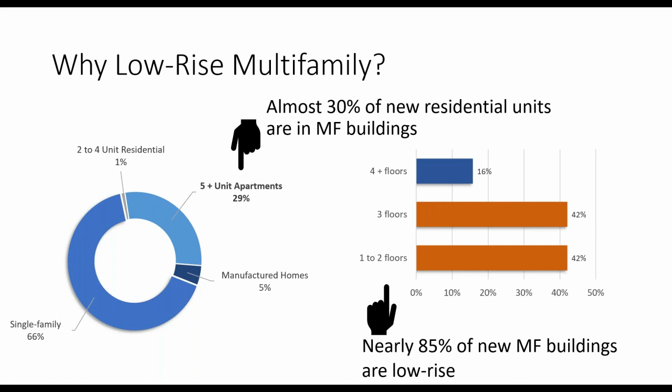For this study, new meant 3 years or newer. The sample frame, given how long these things take to get going, went back a few years, and we'll look at the codes involved in these construction projects. New means not like in the last 2 years relative to 2018, but more in the 2013 to 2016 range, roughly. And again, up to 3 stories above grade, with 5 or more units.

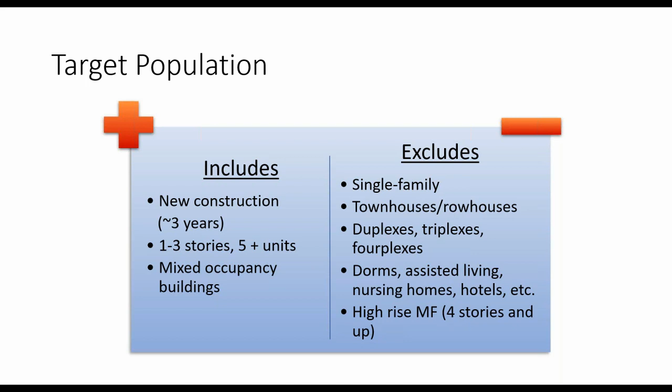Mixed occupancy means that in some cases there may have been commercial space on the ground floor, depending on the site. The study did not look at any single-family homes, duplexes, townhomes, or anything 4 stories or more, mid-rise or high-rise. So just to make clear what we looked at.

One more thing to note here, which has implications both for basic energy characteristics and predicted energy use, but also especially for air tightness testing: there are 2 main construction styles in the sector. One we call garden style - and I don't even know where that term came from - but it means we have exterior entry to each living unit, and the corridors, such as they are, essentially open to the outside.

That facilitates a different type of air leakage test. You can use the common space as a communication point, which is helpful in terms of the speed of doing tests in that type of construction versus garden style. This is important to keep in mind because a lot of the data summaries are broken out by these construction types.

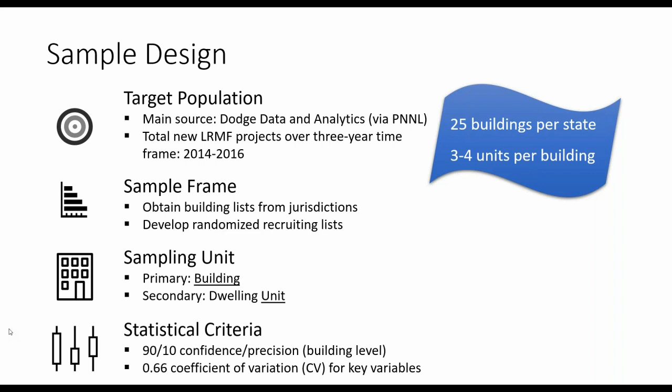We did the work in Illinois, Minnesota, Oregon, and Washington. Because of where people live and where these buildings are being constructed, most of the work was concentrated around larger cities and some smaller cities. In some cases we ended up surveying a near census of all eligible buildings in certain parts of the state, just how it worked out.

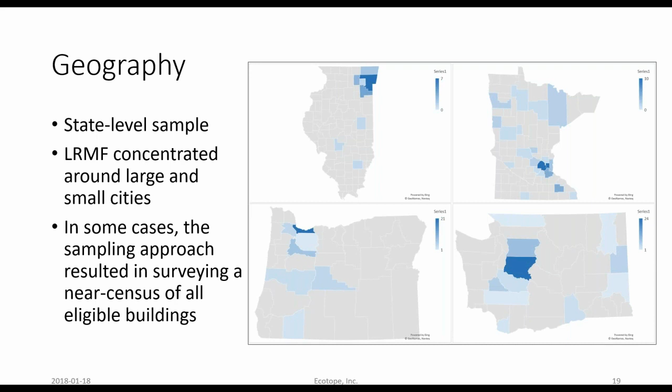Illinois, in the upper left, had a lot of work concentrated around the Chicago area, with some downstate. Minnesota was also concentrated around the major Minneapolis area, with some other representation around the state. Oregon covered Portland and the Willamette Valley. Washington covered Seattle and King County, with some on the east side around Spokane and a few other sites around the state.

As mentioned, this was a two-stage sample design. We start at the building level, meaning the overall complex, where the address is. This includes both common areas and living units in some cases, depending on the building type. The secondary sampling unit was the living units themselves, and generally we selected 3 to 4 units per site.

This was somewhat up to the field surveyor, but the idea was to make it as random as possible to improve the representativeness of the data collected.

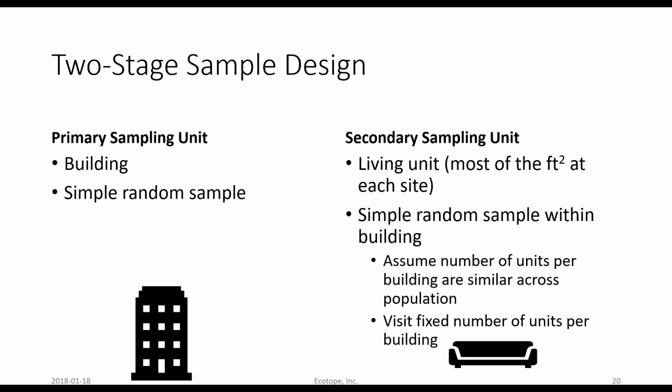Here's an example of the key items being looked at in both the plan review and the field review: the building thermal shell, insulation levels, heating and cooling systems, hot water systems, and so forth. The common area was also looked at, and it's broken out separately because in most cases it was covered by a different code.

Looking at the code references, you can see R references for residential and C references for commercial, all tied to the IECC, the International Energy Conservation Code. Depending on the year, as we'll see in the summaries, it was an older version of the code, as old as 2009 in some cases, up to a newer version, the 2015 IECC, as implemented by the states.

Lighting was also a key factor, appearing in both common areas and living units. These are the things we return to when looking at physical characteristics, because they're the major levers affecting energy use in the buildings.

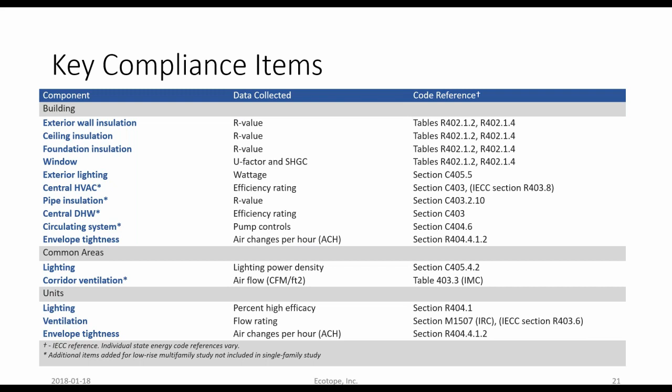Just some more - this is more to show the range of coefficients of variation for these different variables, just to give a sense of how things varied by parameter. It's not meant to start a long statistical discussion, but just to give you a sense of how things would look depending on what you're focusing on. This is discussed in considerable detail in the body of the report, and I encourage people to go there and take a look. We can answer additional questions as well.

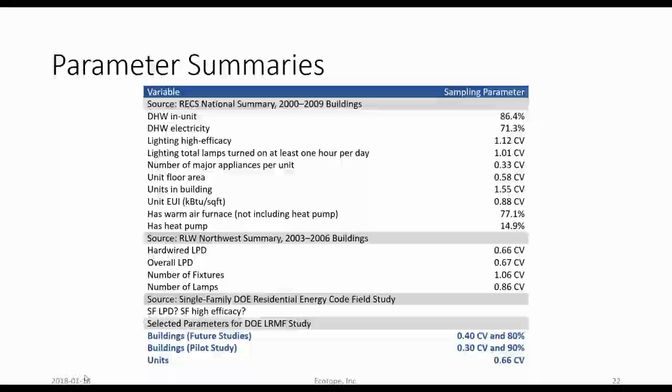Let's see, I'm not sure what we do here. It's time for a Rose polling question - Rose knows what to do. It's time for a polling question.

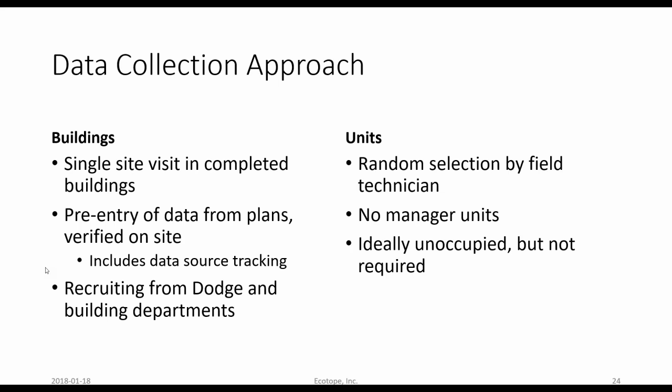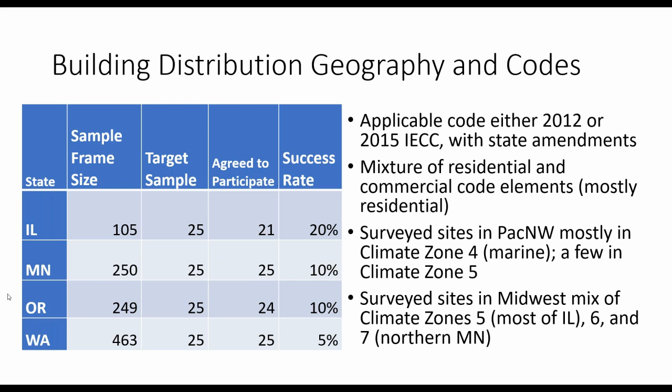As mentioned before, I guess I said 2009, maybe I was too far back - I thought we had a couple that far back, but 2012 and 2015 were the most common IECC versions in terms of how the sites were permitted and constructed. Different states have their own variations on the IECC depending on the components, so that's important to remember. As mentioned before, the climate zones range from a mild marine climate in the Northwest to sites in northern Minnesota with much more demanding continental climates.

Let's see, I think Rose is supposed to - I can't remember how we're going to do it, but I'll introduce Adri. Adri Banks is one of our primary analysts at Ecotope, and she did an amazing job going through the Mount Everest of data and making sense of it. I'll let her describe what happened.

Thanks, Bob. As part of this section of the presentation, I'm going to review summaries of the key energy characteristics collected during the extensive plan review and field verification effort that Bob explained earlier. For this presentation, we'll focus on buildings and common areas, looking at the thermal envelope, HVAC systems, hot water systems, and interior lighting, and spend a little time on the dwelling unit sampling, specifically high efficacy lighting and local HVAC summaries.

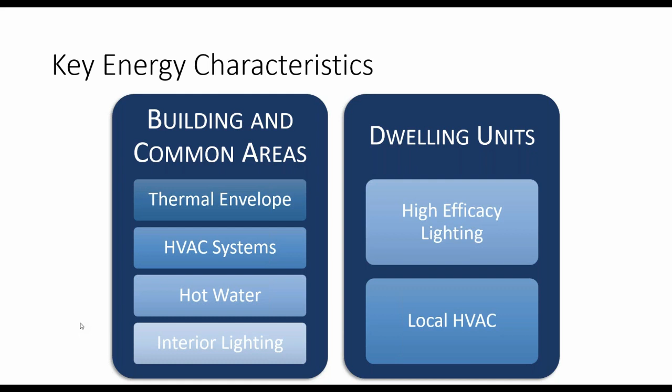I'm going to introduce a graph that's common in the report now available online, standardized from the Department of Energy Single Family Studies that Jeremy overviewed in his introduction, so that all characteristics are summarized the same way. Along the x-axis is the characteristic of interest, and the y-axis is a count of buildings. Each climate zone is summarized because certain climate zones may have different prescriptive requirements, indicated by a vertical line on the plot. There's also summary information about the number of buildings and the average value across the sample. This is a very common graph in the report.

We're going to use, in the following slides, an example from one of the states that overall looks like the general character spread for the 4 sampled states, but there are summary tables with individual information for each of the 4 states below each of the plots that look like this.

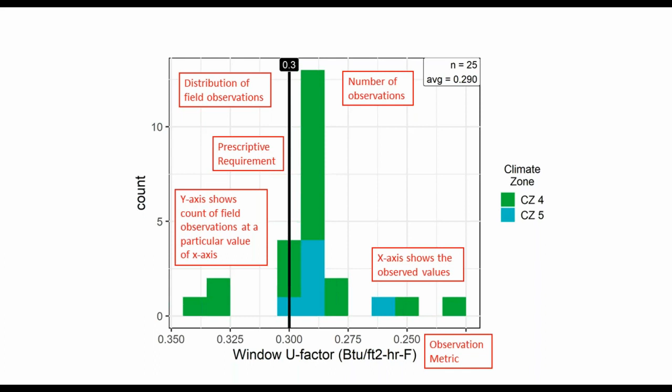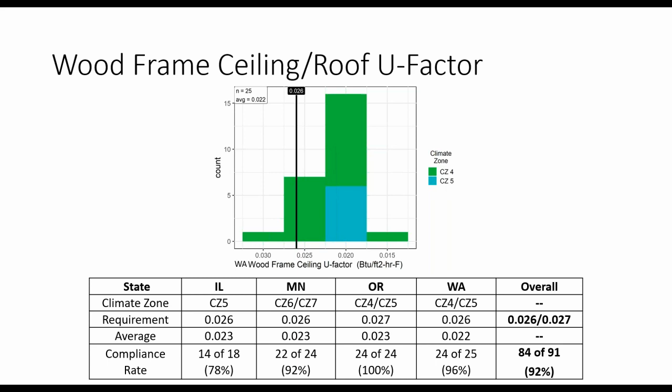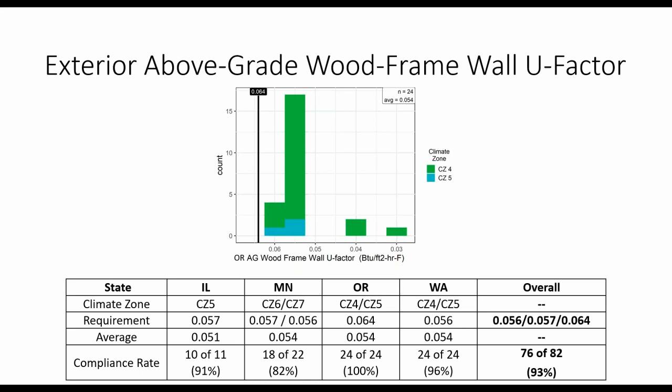The majority of buildings with above-grade wood frame walls, the most common construction assembly, either met or were better than the prescriptive code requirements, so we saw very good agreement with code requirements in this characteristic. The most common construction was 2x6 wood frame walls with sufficient insulation to meet, or at times exceed, the code requirements.

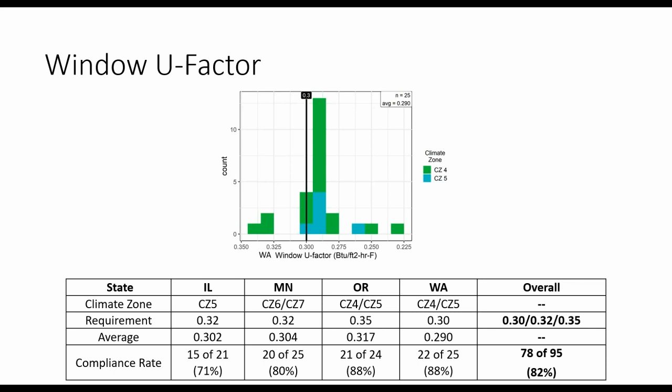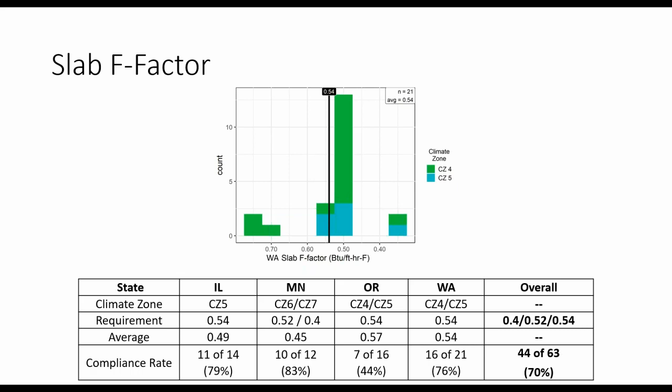We're going to transition out of the thermal envelope realm and look at some system characteristics for water heating and space conditioning. That equipment needs to meet federal efficiency standards, so equipment below that minimum standard doesn't tend to be available in the market. Here we focused on the typical fuels and equipment used to deliver hot water to low-rise multifamily buildings, and we're going to look at a few tables that compare and contrast the strategies used across the 4 states.

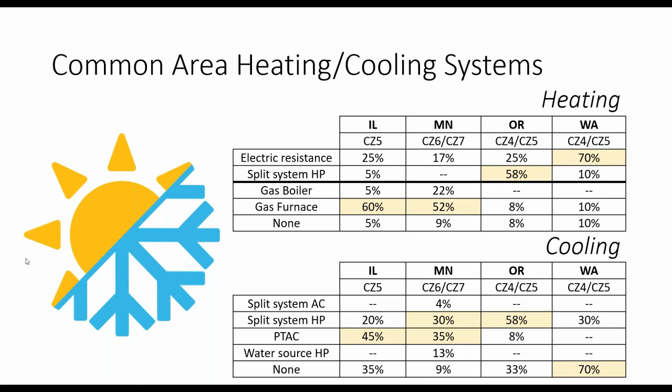As with those common area heating and cooling strategies, we also looked at interior lighting of common entry buildings. And these tables show overall fairly high agreement with the code requirements for both corridor and stairwell lighting power density values. Next slide, please.

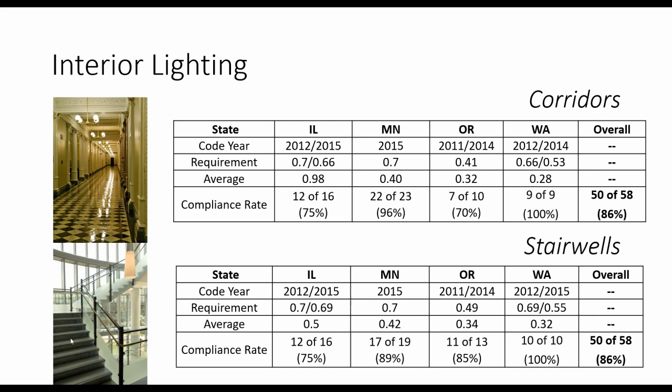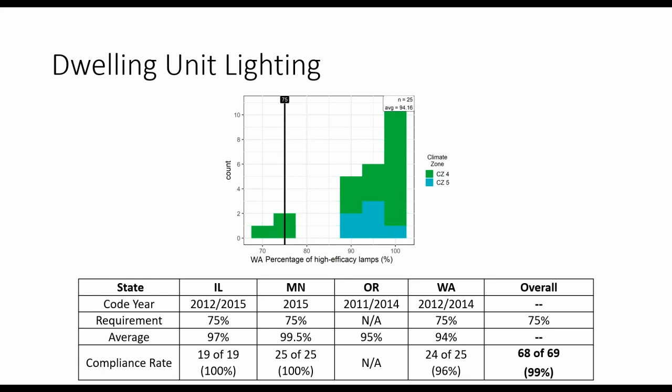So we're going to transition now to a few summaries from dwelling unit sampling, specifically high efficacy lamps and the heating, cooling, and conditioning strategies found in the dwelling units themselves. High efficacy lamps, it's not a code requirement in all of the states. Oregon doesn't include that in their energy code requirements, but it is a common threshold across Illinois, Minnesota, and Washington to require 75% high efficacy lamps. And for this particular characteristic, we found across the board, including in Oregon, a very high level of high efficacy lamps installed in these new construction buildings in the dwelling units. So across the board, over 90% of high efficacy lamps were used. Next slide, please.

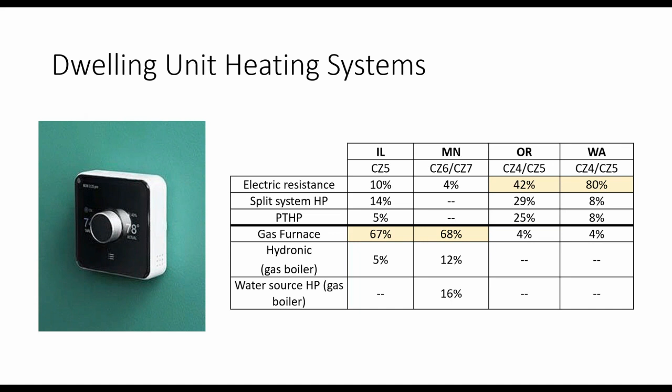So as with building conditioning strategies, we're looking here within the dwelling units themselves, and we do see a fuel split as we did earlier. The gas furnaces were very common in Illinois and Minnesota, with electric resistance being more common in Washington and Oregon, with some heat pump equipment contributing almost equally to Oregon, along with their electric resistance. Next slide.

So here we have the cooling systems, and we do have some overlap in the strategies that were used across the states there, with commonly having unducted packaged terminal air conditioning strategies, as well as split system ducted systems. And a lot of split system and packaged systems used in Oregon as well. Also of note is that in Washington State, currently the climate is mild enough that we didn't observe a high number of cooling systems installed for dwelling unit conditioning. With that, I'd like to pass the presentation to my colleague, Scott Spielman. Rose, next slide.

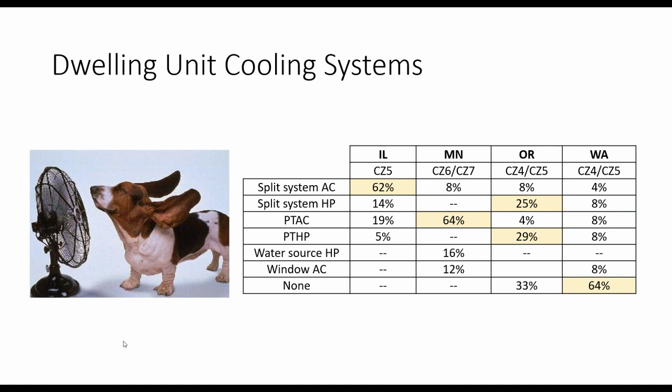Great. Thank you, Adria. I'm an engineer also at Ecotope, and I was responsible for much of the energy modeling and analysis portion of the study, which we'll discuss in the next few slides.

The first thing I'll discuss is the energy use analysis. Here we estimated the annual energy use of each building surveyed to create an expected EUI range for low-rise multifamily buildings in each state. EUI, as some of you already know, is the energy use per square foot. It's a useful metric for comparing energy use in different sized buildings. We used PNNL prototypes as a starting point to create 4 different seed models. The seed models included common entry and garden style layouts, as Bob mentioned earlier in the presentation, and those were combined with and without a basement.

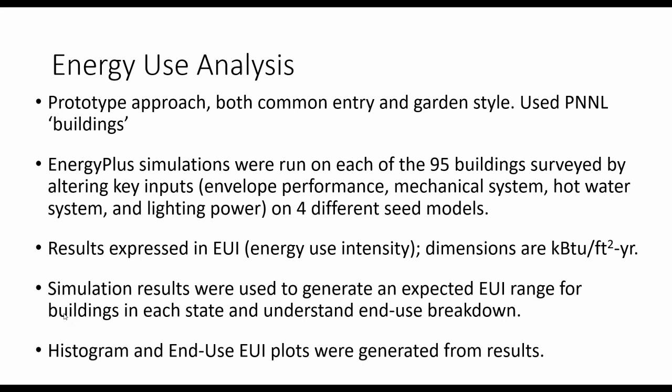For each building surveyed, a seed model was chosen that best represented that building's geometry, and then key inputs were altered in those seed models, including all the characteristics that Adria just discussed: envelope components, lighting power density, mechanical and hot water systems, to create 95 individual models to represent the buildings. Simulation results were used to generate EUI ranges for the surveyed buildings, and results also allowed us to understand the end uses: heating, cooling, hot water, lighting, and plugs, and how those end uses changed due to building characteristics and climate. Next slide, please.

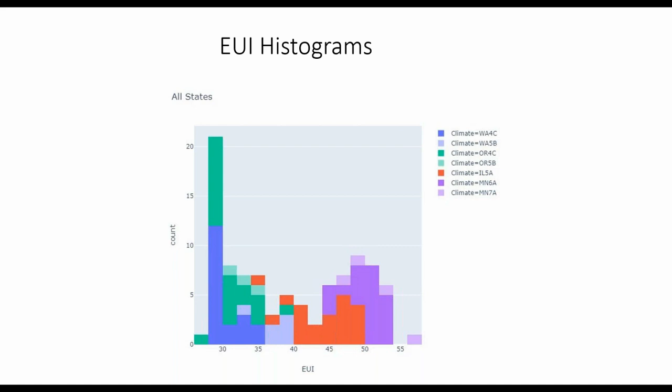Due to the relatively mild climate in Oregon and Washington, shown here in green and blue, those states have a lower EUI range centered around 30 EUI. Illinois and Minnesota, which are shown here in red and purple, have colder climates, and their EUIs are centered around 45 and 50 respectively. Also note there's higher EUIs in Eastern Washington, which is represented by the light blue climate zone 5B, because of its colder climate. Next slide, please.

Hot water and heating showed the largest variability and potential for savings. Heating was affected by both the chosen mechanical system and the envelope performance, whereas hot water was affected by the hot water system only.

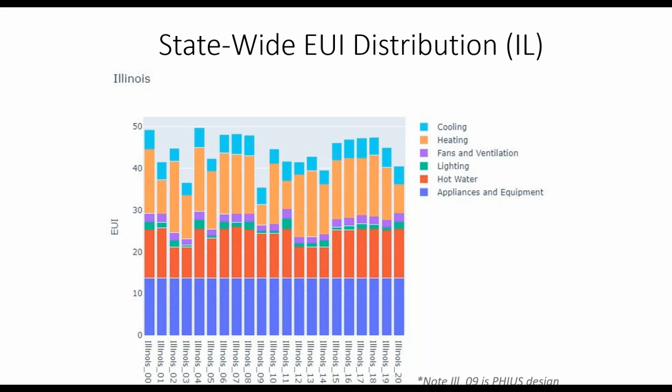The second part of the modeling analysis was the measure analysis, and it was used to quantify the energy and cost savings for bringing envelope and lighting components up to code compliance at a statewide level. Findings were extrapolated to a statewide level using surveyed buildings as a representative sample.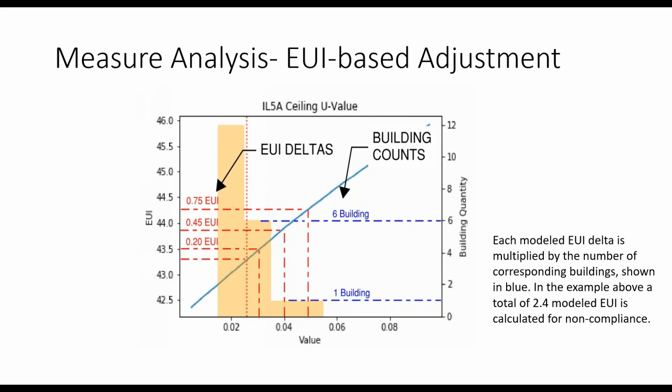This would estimate the savings from all the buildings in the state.

Statewide energy and cost savings were then extrapolated to a statewide level using census data to determine the total number of units in the state. The table above shows the savings for Illinois. As shown, exterior wall U value has the most opportunity for savings should every building be brought up to compliance—these are the savings left on the table, as Jeremy mentioned earlier. However, relatively good compliance, which Adria discussed, was seen in all states, so there wasn't an enormous amount of savings opportunity found.

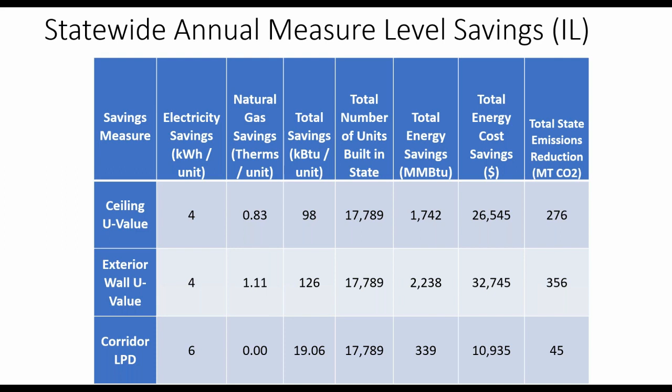So just to summarize, most buildings surveyed met or exceeded code, resulting in little savings in the measure analysis. Climate, mechanical system type, and hot water system type had the biggest impact on modeled energy use. And high efficacy lighting was common.

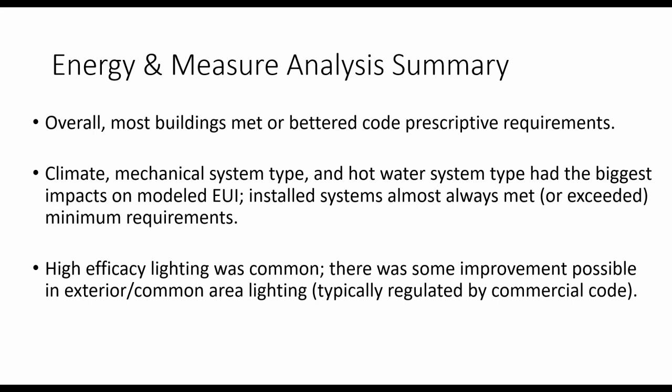I'm just going to take a few minutes to walk you through the top line findings from the market research task.

As Jeremy and Bob both mentioned, low-rise multifamily kind of fits into this strange category that's kind of residential but kind of commercial. Going into the project, there was a lot of curiosity about who constructs these kinds of buildings, so we did some work on that. While we were asking about the characteristics of these firms, we also wanted to get information on knowledge of the residential code, availability of code training, and perceived needs for code training.

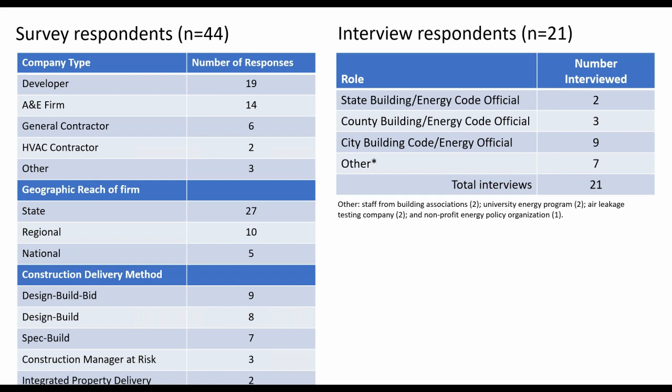On the interview side, we were mostly talking to local code officials, but we did do some interviews with state code official folks, and a couple of folks involved in third-party testing and verification.

So one of our big questions was, who is it that builds low-rise multifamily? Is it mostly single-family builders that are moving over and building the slightly bigger multifamily building? Is it firms that mostly work on mid and high-rise multifamily or commercial buildings, and sometimes move down and build the smaller low-rise multifamily? The answer seems to be all of the above.

So we asked each respondent how much of their business came from each one of these building types. For example, for single-family homes, on average our respondents said that 13% of their business was single-family construction, but that ranged among individual respondents from none to 70%. So on the 70% side, we do have some folks out there that mostly build single-family homes but occasionally cross over and do some low-rise multifamily.

Similarly, on the other end, we've got an average of 21% of respondent business being commercial buildings, but that again ranges from 0 to 70%. However, I think you can see that probably the majority of the work is done by firms that mostly focus on low-rise multifamily, or maybe larger mid-rise multifamily. Another thing we found is that most of our respondents work at firms that aren't large, doing fewer than 10 projects per year.

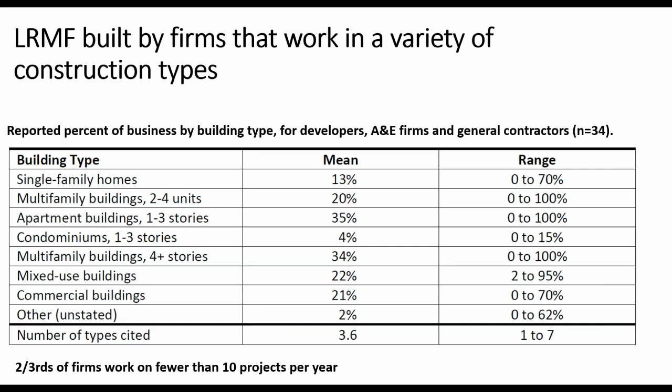When we asked about knowledge and needs regarding residential code, the big thing that cropped up was that in some states there's clear confusion about which code applies in what situation within low-rise multifamily. It gets kind of tricky where, if you have 1 story of commercial topped by 2 floors of residential, I think most code interpretation would be that the first floor is treated as commercial code, but the upper 2 floors are subject to residential code. But we found respondents telling us no, it should all be commercial code.

Another situation is when you have underground parking topped by 3 floors of residential - there are differing answers about which code is applicable. Most of this seemed to be cropping up in Minnesota and Oregon, and less so in Illinois and Washington.

We found that most respondents got most of their information about code, or their knowledge about code, directly from the code officials they work with or from online resources. Developers mostly said that they mainly rely on their general contractors or subcontractors to know the code and make sure the building is up to code. Architects felt like they had a pretty good handle on the code that applies to them - oftentimes they're very knowledgeable about the shell requirements for code, but the mechanical system stuff is something they just rely on the HVAC subcontractors to know.

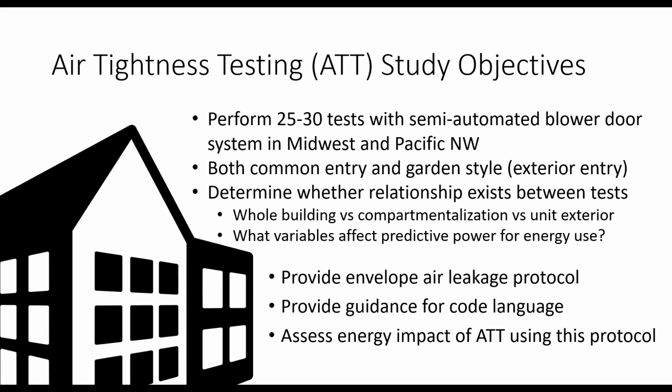So I think we succeeded in collecting an enormous amount of valuable leakage data. The 350-page final report includes over 125 tables and almost 250 figures. But the best method for how to test multifamily buildings is still an open question, and that's partly because it depends on your criteria. Next slide, please.

So in this part of the presentation, I'm only going to be able to provide highlights of our results. I'd encourage you to dig into the final report when it becomes available. And sometime in the future, we're looking at providing a webinar that'll just focus on the air leakage test results for those of you whose primary interest that is.

So I'm going to start out here talking about the results from the whole building tests. So these 2 diagrams show the setup for the tests.

For garden style buildings, shown on the left, that test is performed by putting a blower door in every unit and conducting a 50 pascal depressurization test simultaneously on every unit. That way there's no airflow between the units, there's no inter-unit leakage, and the sum of the blower door flows is the whole building exterior leakage.

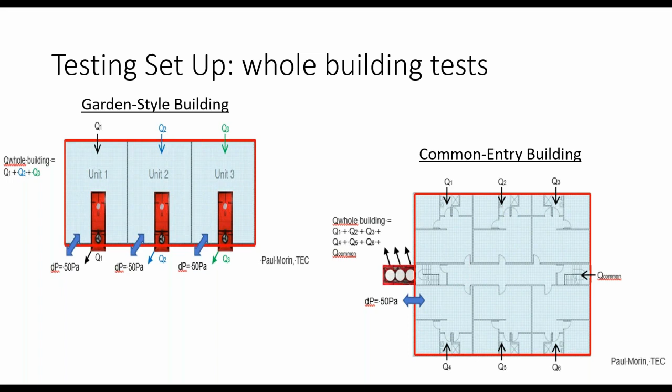So for common entry buildings shown on the lower right, you use one or more fans in the entry, so an exterior doorway. You open up all of the hallway doors for the units so that you pretty much have a single zone, and then the sum of the blower door flows is equal to the exterior leakage. Next slide, please.

So the good news is that there was 100% compliance based on the whole building test. Only 3 buildings were greater than 3 ACH 50, and the average was 1.6 ACH 50.

The average was lowest in Minnesota, which might be expected since it had the lowest code requirement, and Washington had the highest average. The lowest for an individual building was 0.4 ACH 50 for a passive house certified building in Illinois.

So we go to the next slide, please.

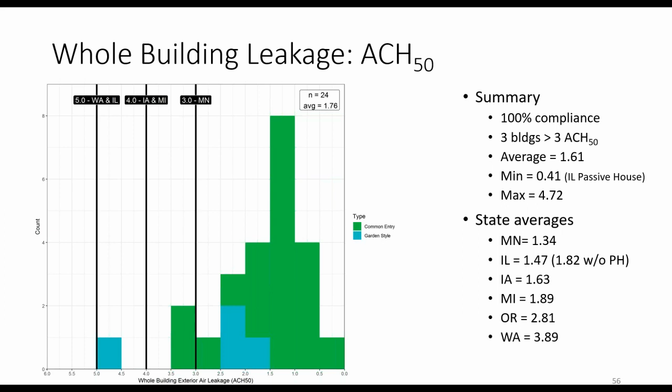So normalizing the leakage at 50 pascal with the building volume to compute ACH 50, or air changes per hour at 50, that's been the standard practice for single family houses. However, for larger buildings, it's a lot more typical to normalize by the envelope surface area.

So this chart shows the whole building leakage at 50 pascals normalized by the envelope exterior surface area. For this, the average was 0.23 CFM50 per square foot, and 83% of the buildings were below 0.3 CFM50.

A useful reference is the Army Corps uses a requirement of 0.25 CFM at 75 pascals per square foot of envelope area, which is about equal to 0.19 CFM50 per square foot. So about half of the buildings met the Army Corps leakage requirement.

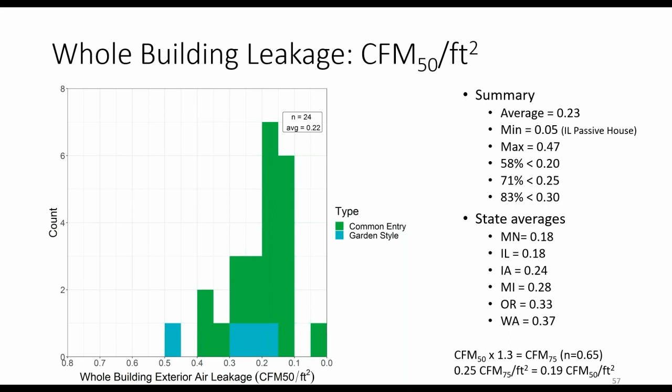So we were interested in identifying what building and design characteristics were having an impact on the building leakage. We compiled information on the code requirement, roof or attic type, any energy program leakage requirement, type of space below the lowest occupied level, and the air barrier design.

So we evaluated the common entry and the garden style buildings separately. Next slide, please.

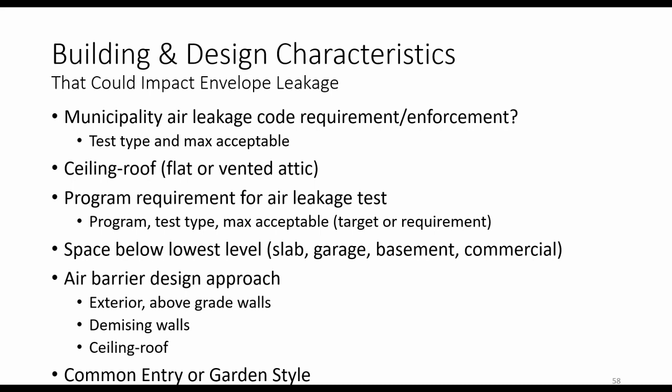So for the common entry buildings, we conducted regressions of the variables with the whole building leakage, and we found that the type of attic and the code required leakage had a significant impact on the measured building leakage.

So this chart indicates the code required leakage on the horizontal axis and the whole building leakage on the vertical axis. So the buildings with flat roofs are indicated by the blue symbols down lower, and the vented attic buildings are in red. So you can see the significant difference between the buildings by attic type.

The vented attic buildings are consistently leakier than those with flat roofs, and there's generally a good relationship between the code required leakage and the measured leakage. And then the passive house certified building was a low outlier.

So it was kind of interesting that the energy program requirement, the space below occupied level, lowest occupied level, and the type of exterior air barrier did really not correlate well with the building leakage. Next slide, please.

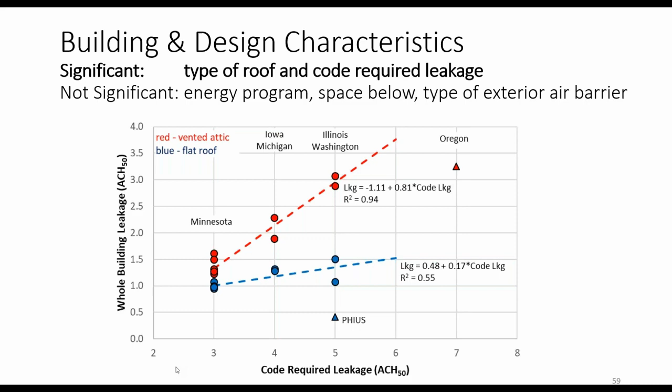So let's move on to the leakage results for individual units. These diagrams show the setup for compartmentalization testing that measures the total leakage of an individual unit. So this includes both the exterior and interior leakage.

This test is really similar to conducting a blower door test on a house, but it's just for an individual unit. You test only one unit at a time and you get the total leakage of the unit. Next slide, please.

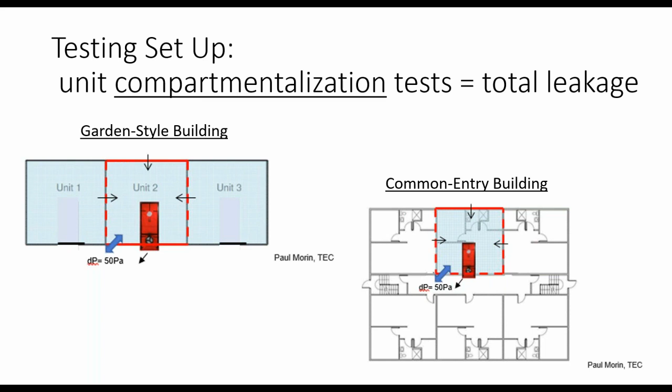We also conducted a guarded test to measure only the exterior leakage of the unit, as shown in the upper left. For garden-style buildings, this is really the same as the whole building test, since they're all being tested simultaneously, there's no airflow between the units.

And the blower door flow for each unit measures the exterior leakage just for that unit.

The challenges are that you need a blower door for every unit. So if you've got a 16-unit building, that means you've got 16 blower doors that you need. And the test needs to be coordinated to make sure you're doing simultaneous measurements.

For the common entry buildings, the guarded test is a combination of the whole building and compartmentalization tests. That diagram is shown to the lower right.

You use the fans in the building entry and you open up all the hall doors like you do on the whole building test to depressurize the entire building to 50 pascals.

And then at the same time, you put a blower door in the hall door of the test unit and you adjust the flow rate so there is no pressure induced between the test unit and the adjoining units. So with that approach, the blower door is simply measuring the exterior air leakage for the test unit.

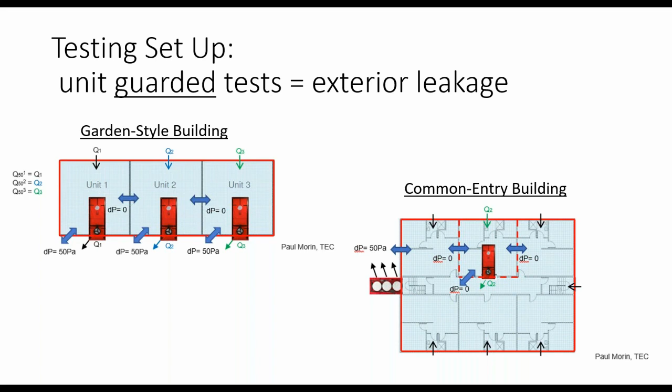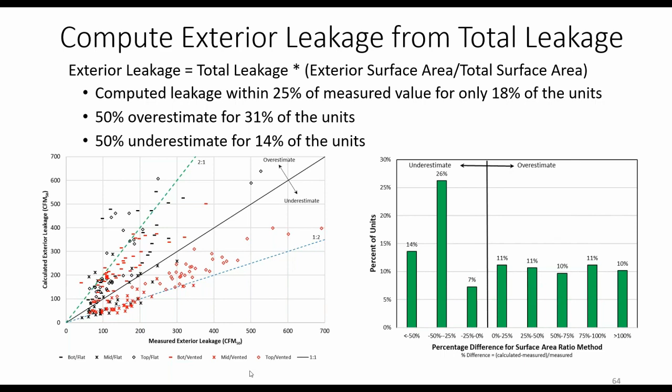We also worked on a method for garden-style buildings to use a pressure measured in adjoining units during the compartmentalization test. I'd say that approach shows some promise, but it needs more work. So if you want to continue on to the next slide, I think we'll go ahead.

We also looked at the impact of common space exterior leakage for the common entry buildings. Overall, the common areas were 70% leakier than the residential units. For 7 of the 20 buildings, the common area was more than twice as leaky as the residential units. On average, the common area leakage made up about 29% of the total leakage in the buildings. So ignoring that certainly ignores a lot of the air leakage and energy use in the building.

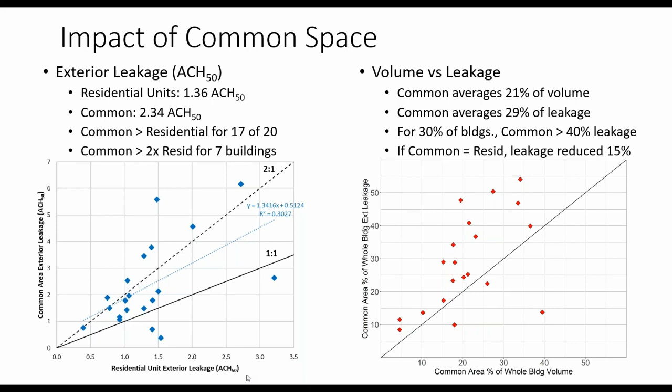Okay, we want to go to the next slide. So just to summarize things, again, the whole building procedure tends to be equipment and labor intensive, especially for garden style buildings.

All of the buildings we measured met the state required leakage levels for whole building leakage. We found that the type of building, roof type, and the code required leakage had significant impact on the measured leakage. Not so much for the other variables we looked at.

The common areas were significantly leakier than the residential units, and they have a significant impact on the whole building leakage. The percent exterior leakage averaged 34% for the common entry buildings, somewhat higher at 54% for the garden style. Those are median or average values, and the surface area ratio method tends to be a poor predictor of exterior leakage when applying that from the total.

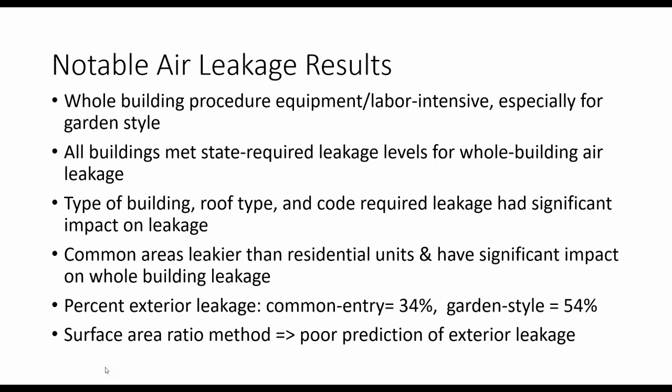Next slide, please. So as I mentioned, it's quite a long final report. I just tried to hit the highlights here. The final report includes a number of other interesting findings.

Again, I talked about the accuracy of using a multiplier to convert total leakage to exterior leakage, a method for using the adjacent unit pressure difference for garden style units to go from total leakage to exterior leakage. We also have a breakdown of the interior leakage to the common space and adjoining units.

We looked at the impact of whether you keep the adjoining units open or closed for compartmentalization testing. We looked at the variability of the measured leakage for units within a building and on the same floor, to help with the issue of how much you need to sample, or how many units you need to sample to get a good measurement. And then we looked at the number of fans needed for whole building tests.

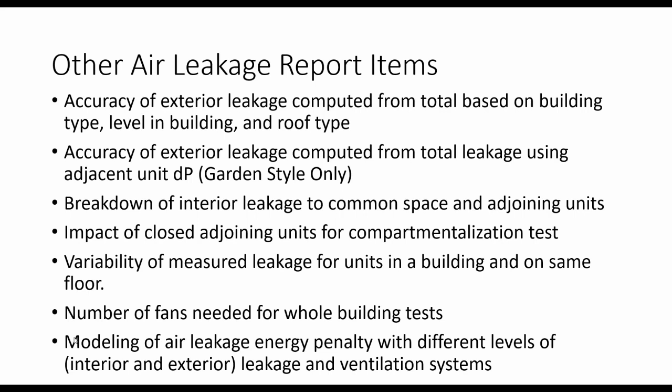And then there's a very extensive section where we did modeling of air leakage, kind of the energy penalty with different levels of interior and exterior leakage and ventilation systems. So basically we did energy use simulations. And then to wrap things up, some ideas for future research, and we're getting short on time, so I'll leave that there, and I think we need to move on to Q&A.

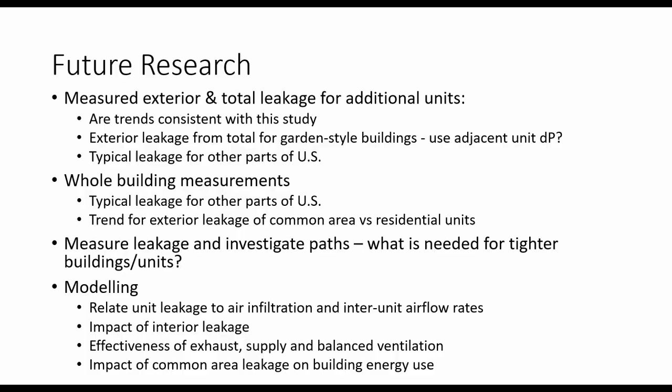This is about building characteristics, and there were some specific questions, but this one is about above grade walls. That wall framing factor in multifamily is frequently quite high. Was this detail considered when you were assessing wall compliance?

Great, thank you. The wall framing factors were measured through looking at the construction assembly of the walls, so what materials that wall was made up with, as well as a variety of insulative components, be that sheathing or blown-in, batts, etc. And that information distilled down to a U factor for each of those wall types or assemblies. We then took, by wall construction type, a weighted average value across the wall area for that building. So to distill it down to the major area for each building that was of that given wall construction, and what that weighted U value was for the building, to look at that against the compliance value for each state.